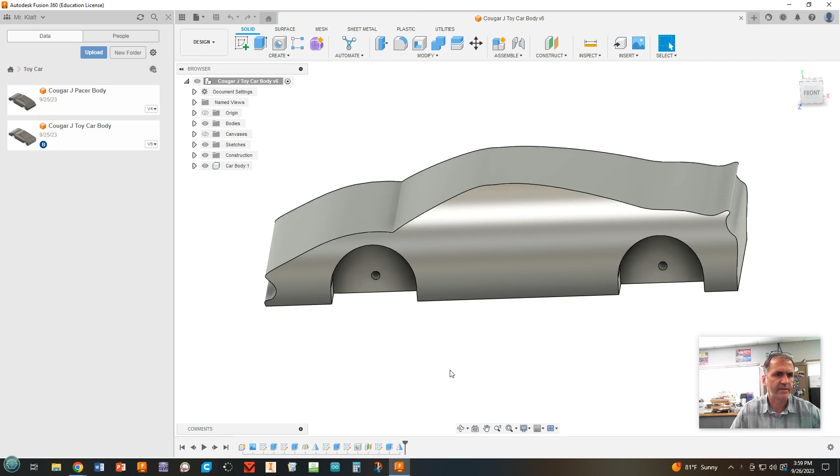All right, folks, welcome back to our continuing quest to make our toy car. We are now on part 3. If you haven't gotten to this point and don't have all the stuff that we did in part 2, make sure you go back and redo that because it has to be done before we move on.

Before we do anything, I need us to do some housekeeping stuff here. Make sure you're in your toy car project. I show more than you do. You probably only have one thing in there. I've already done some stuff in here. You should take your car, which I just renamed to be clear. Make sure you're looking at it, and we're going to right click and copy it.

Now, it's going to ask you where you want to copy it. You want to go to the same place that you are and make a copy. Notice it's going to show up and say the same thing as before. It's going to call it toy car body. They look exactly the same. But the one that you just made a duplicate of, we're going to right click, rename it, call it toy car body and add 3D print to that.

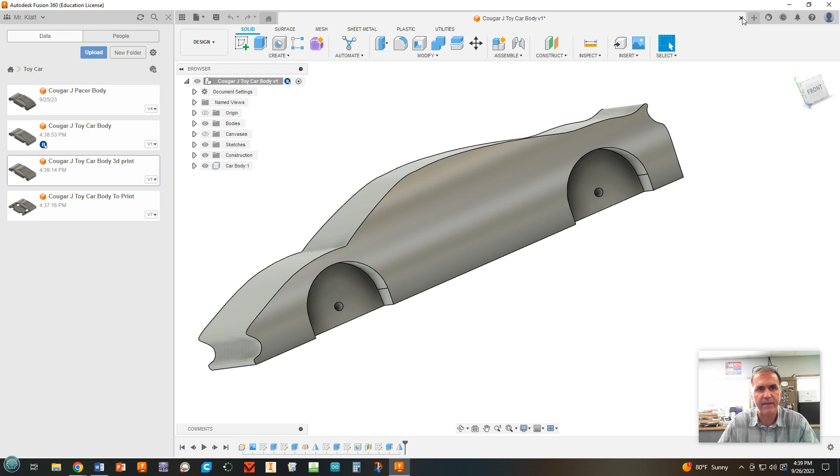All right. Now, let's make sure that we're in the right thing. So close the one that you're in. You can save it if you want. Make sure that we're there. And then open, double click on the one that says 3D print on it. Double click. Come on, open for me.

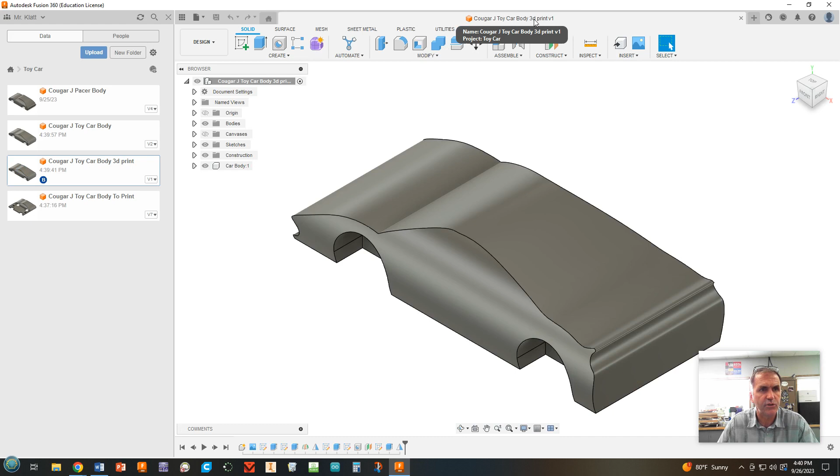Mine's taking a minute. Make sure that up here in the tab, it says 3D print, because we're going to mess that one up and do different things to it. And then we're going to come back to the other one later to do some different things on. So make sure you're working on the one called 3D print.

All right, before we start, there's a couple modifications that I need you to make, because I realized later that the axle holes were a little bit too small to fit the axles for the wheels. So we're going to go ahead and fix that. With your car open, hover over your timeline until you find the extrusion where we made that first hole.

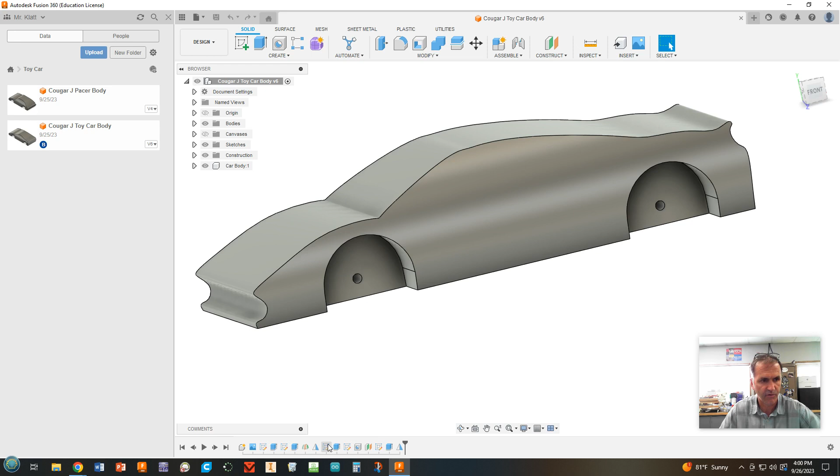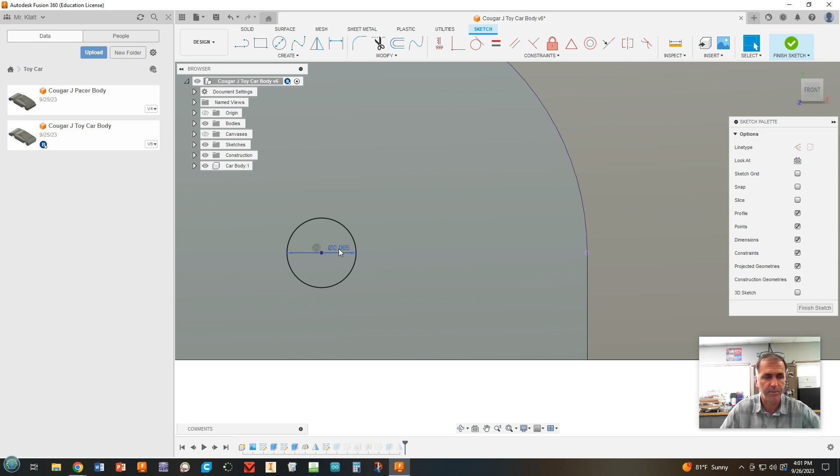There it is. Now, what I want to do is edit the sketch where that circle was made. So we're going to find the sketch that came just before that hole. See how it shows up when I hover over it? Double click on that sketch to edit it. Right now it says 0.05. We zoom in a little bit. We're going to double click on that 0.05 and make that 0.065. Enter. Notice how it got a little bit bigger. Finish sketch. And the hole just got a little bit bigger because I modified things.

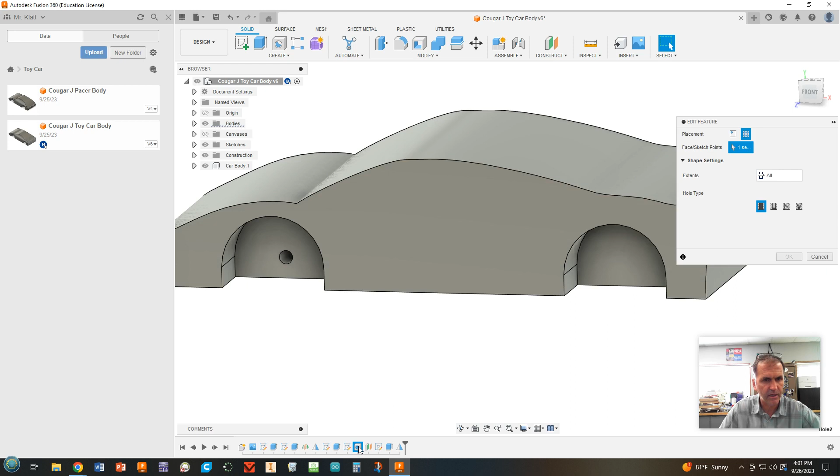Now we're going to go to the other one that we made, which was a hole. So again, hover around until you find the hole. Once we are at that point, we're going to double click on that. And again, we're going to change this diameter from 0.05 to 0.065. It's going to 3D print a little bit better that way.

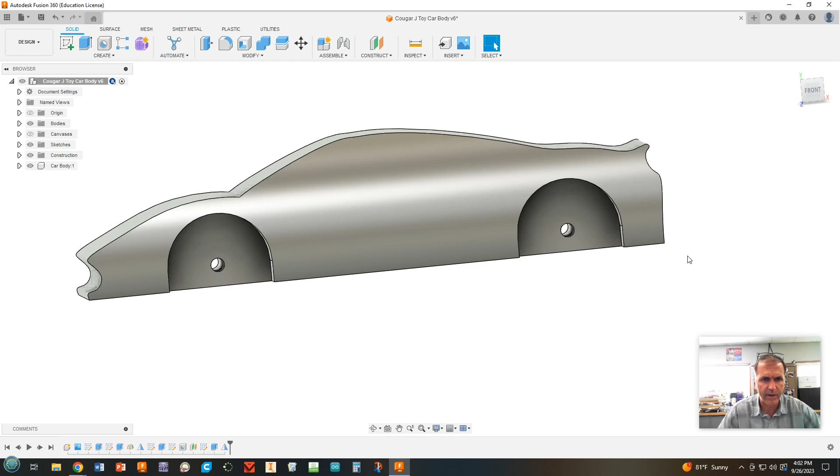Now, we need to do a little bit of checking to see if things are right before we move on. First of all, you should have a flat surface along the bottom that was that original 2.75 line that we made. There shouldn't be anything protruding below it. It shouldn't be wavy or anything weird. I noticed some students tried to draw along the bottom of the car with a spline line, which we weren't supposed to do. So if you don't have a flat surface with nothing protruding below that surface, then you need to see me and we need to talk about fixing it. So that's one part that needs to be true.

Another thing that needs to be true is that the center point of these axles needs to be 1.1 inches from the bottom. So here's how we're going to check that. We're going to go up to construct and make an axis through a cylinder. We're going to do this twice. So construct, axis through cylinder, and hover over that cylinder and you should see a blue line show up.

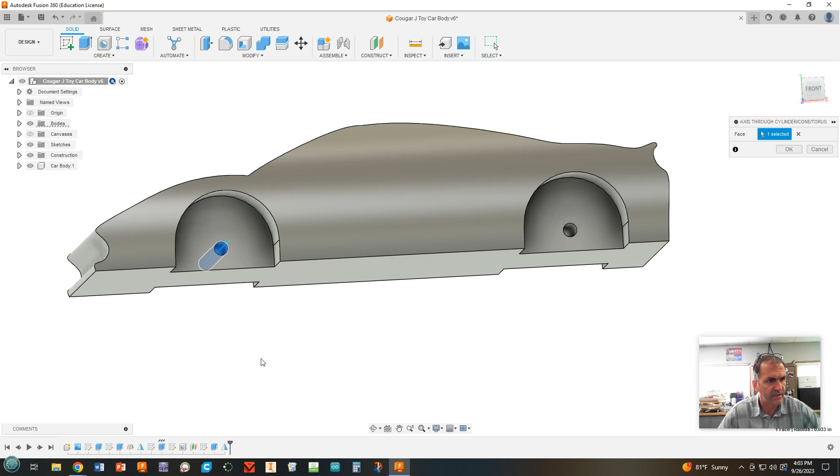Okay, then we're going to click OK, and we're going to do that one more time. Construct, axis through a cylinder, click on that cylinder. Okay, all right. Now we're going to do some measuring.

Move myself out of the way here, make sure I'm not in a command. Actually, I'm thinking a different thing that has the measure tool down there. But okay, we're going to go to inspect, click on that measuring tape thing, and we're going to click on the line, make sure the line highlights, and this face in the middle of the face, okay? And you should see somewhere that that distance is 0.1 inches, okay?

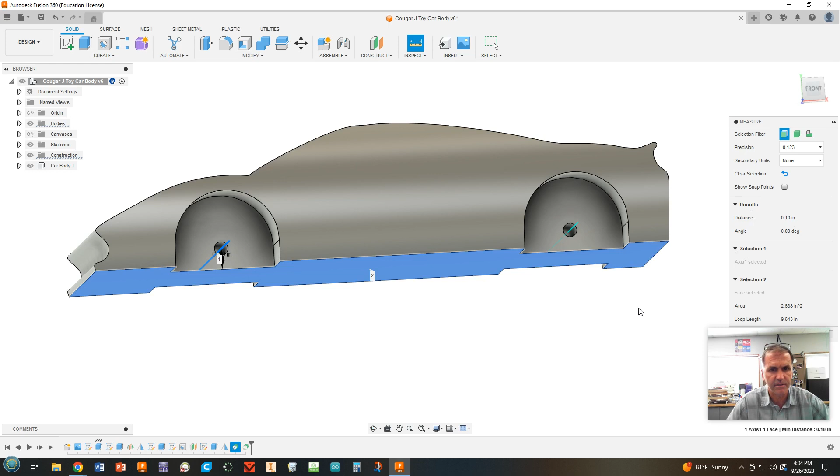And then we're going to do it again. Hit escape a couple times, inspect. We're going to go from this blue line to this middle of this flat face. And again, it should be 0.1. If that is not true, see me, because that's got to be that way.

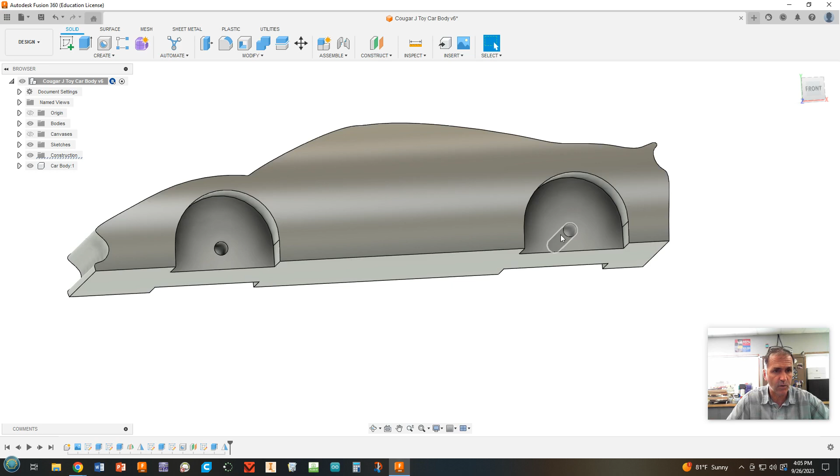Okay, once we have ensured that those distances are 0.1, we can go ahead and delete these two axes because we don't need them. And I like to keep things out of the timeline I'm not using. Okay. All right, now we're going to get this thing ready for 3D printing. Now, one of the things we're going to do is we're going to split this through these holes and then screw the bottom part back on. But I have to get the holes ready to go first.

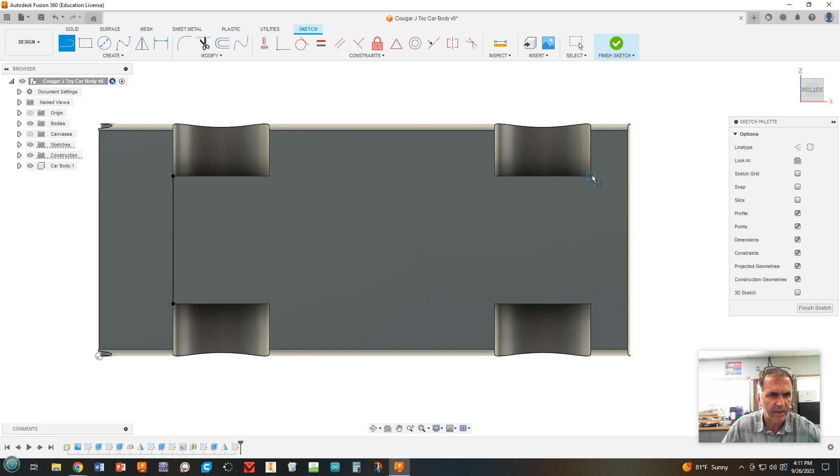Start by making a sketch on this bottom surface. So we're going to sketch on this bottom surface. Now we're going to draw a line between the outside corners of the wheel wells. So from that little corner of that wheel well to this corner of the wheel well, and the same in either the front or the back. Okay. And it's the outsides.

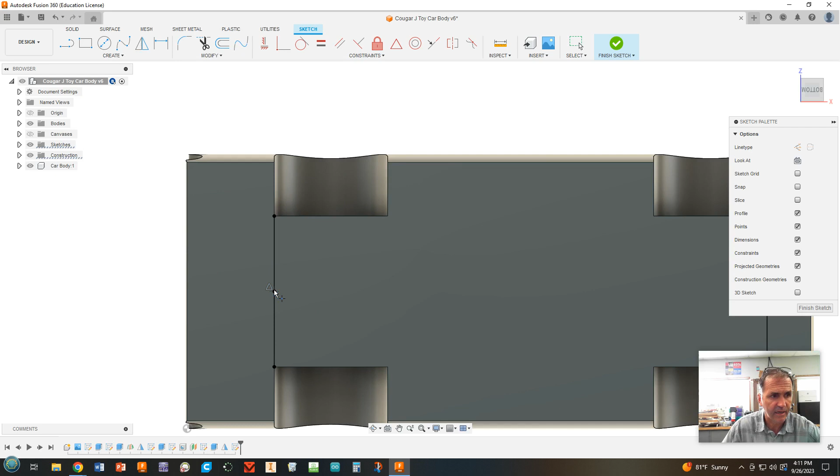All right, I'm going to hit escape to get out of that command. Let's create a point. We're going to create a point, and we're going to hover over that line until that little triangle shows up that shows I'm right in the midpoint. Click. It should be a black dot. If it's blue, we didn't get to the right spot, and it should show that little triangle. Again, hover around till you see that part. Okay, we've got two little dots, and once we've got that, we're going to finish sketch.

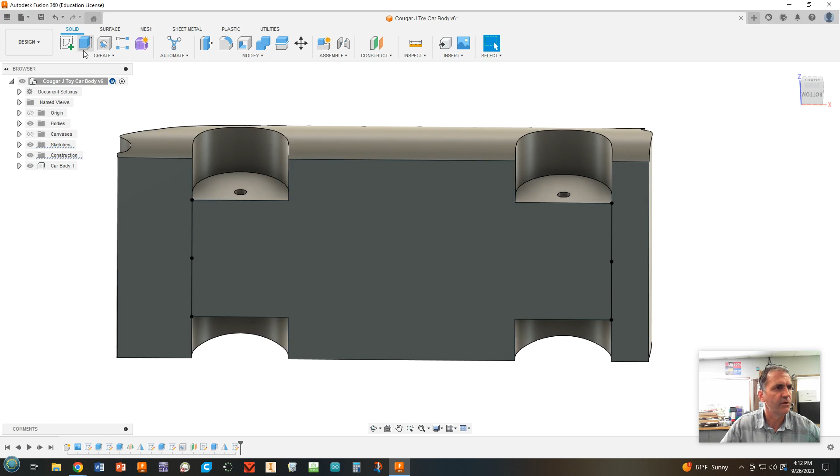Okay. Now, follow this process because this might not work for you the way we're doing it. And what will have to happen is you'll have to redo this with the lines on the inside if it doesn't work instead of the outside, but it's the same process. All right, so I'm going to go ahead and make holes on those points by clicking the hole command. Okay, now we're going to click those 2 points.

Don't worry that it looks crazy like this. Okay, we're going to click those 2 points. Yours might be totally different looking. They might look really weird. Don't worry, we're going to fix this. Okay, so while this window is open, the hole window, we're going to go ahead and click on this hole type we're going to put in the middle with the counter bore. Okay, it's got a little recess for the head of a screw to sit in.

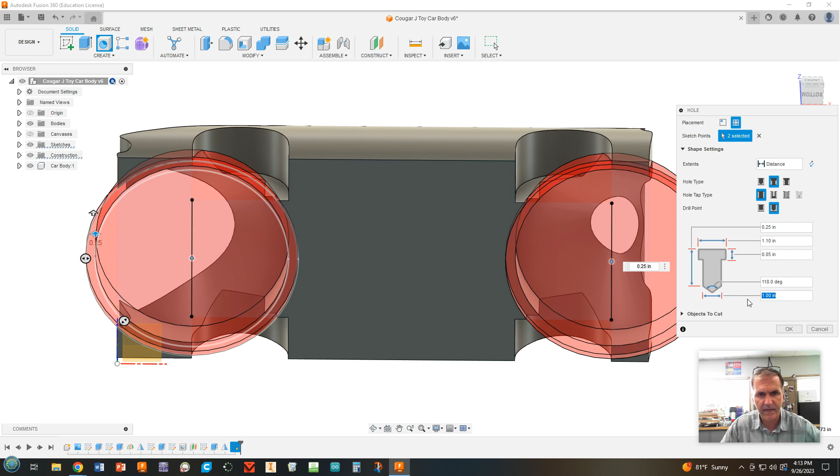We're going to keep the hole tap type simple over here on the left. We're going to keep the drill point the way it is. Now, I'm going to work from bottom to top here for making the right sizes. So the first one is the diameter of the hole. So you're going to click and highlight that bottom one and change it to 0.12. Okay, see that hole get smaller? It's all going to get better. Next is going to be this angle of the cut for the drill bit, which is going to be 100. Again, I highlighted it, changed it.

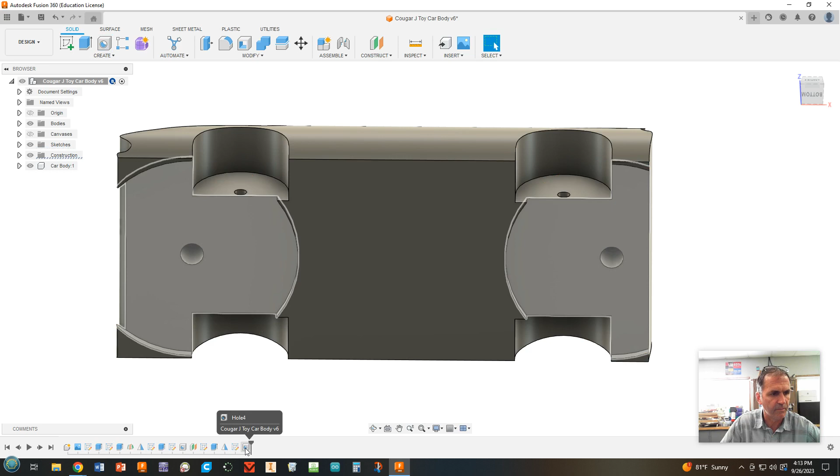But the height of this counter bore, the next thing, is 0.05. Now, it happens to be that way, but if it's not, 0.05. I accidentally hit enter. Sometimes that happens. Whoops, that's not what I meant to do. So I'm going to go back to this hole, double click it. I'm editing it again. Now, the width of the entire counter bore is going to be 0.25. Okay, notice things are starting to look a little bit better. And then the depth is going to be 0.3.

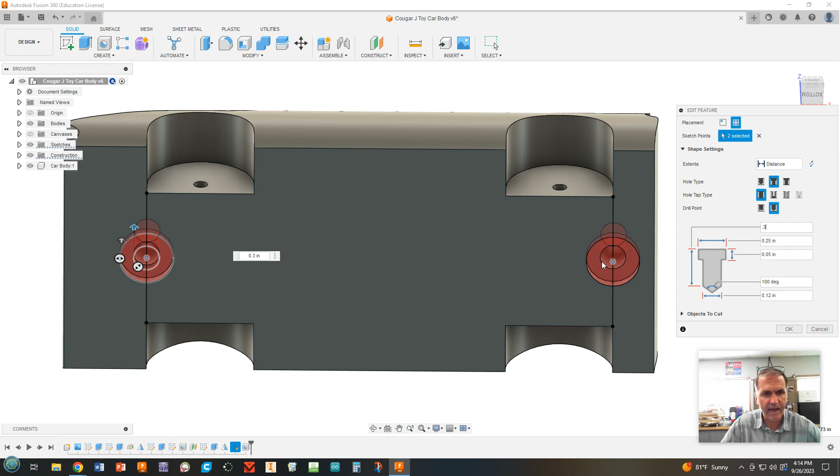All right, now, if your counter bore thing is off the end of your car, then what you're going to have to do is go back, and instead of drawing the line from here to here, draw it from there to there. So you're going to have to kind of undo some steps and go from here to here or here to here.

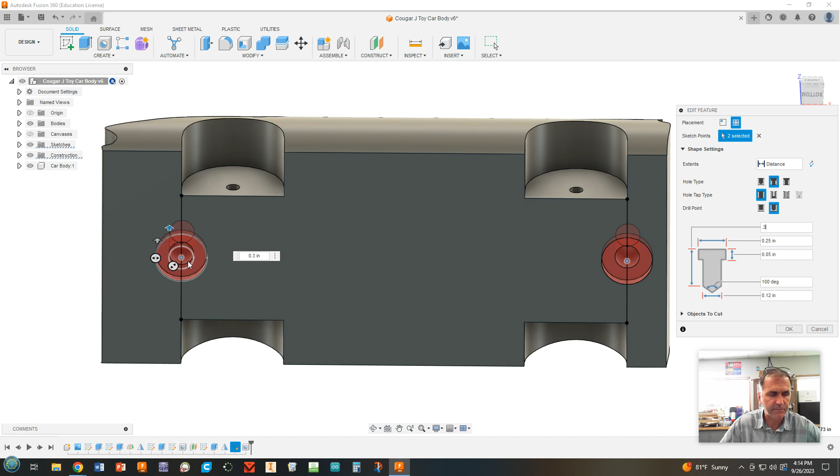to bring it inside. I'd prefer it to be out here, but it might cause you problems. And if it does, you can just fix it. Same thing if you find that in the preview, if this is going through the top, let me show you what I'm talking about. I'm going to make this like 0.5, right? So you can see it going through the surface. If you see that, or even just a little point,

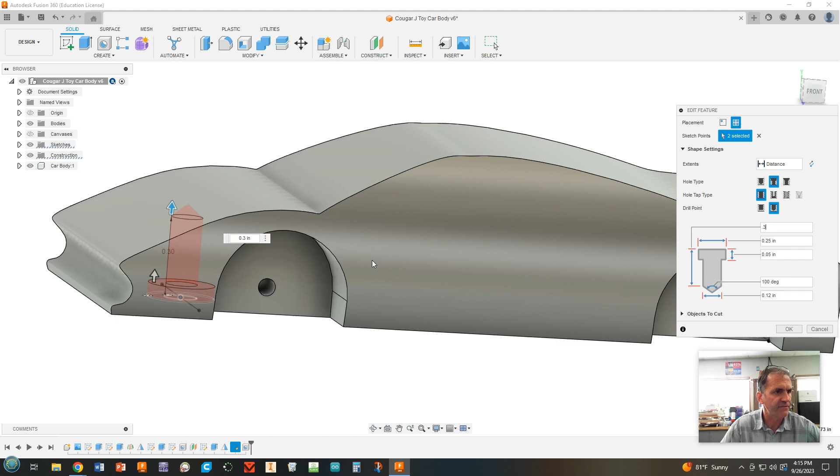okay, let me change that. I'm going to try and make it so what you might see, right? See how you can see a little bit of that hole coming through? Then again, you might have to put your lines and your points on the insides of the wheel well instead of the outside of the wheel well. So do what works for you. And once that works, we're going to click OK. All right. Now, we've got those holes.

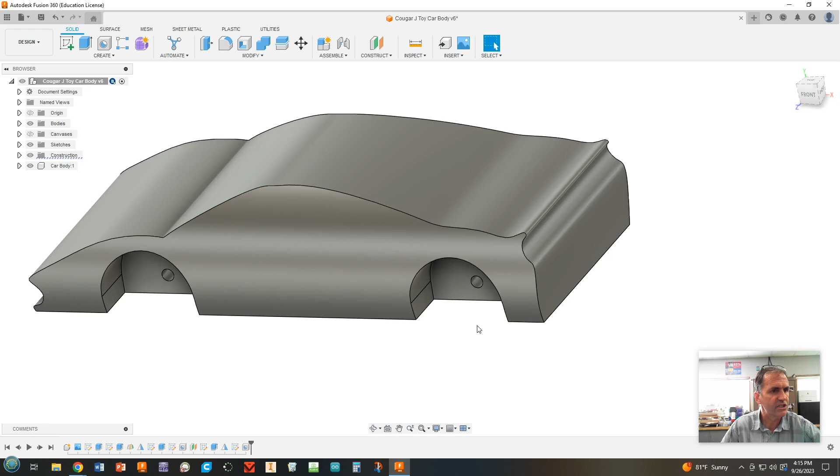Next is we are going to split this thing into two pieces. So here's how to do that. Remember that we checked to make sure that the center of this hole was exactly 0.14 away from this surface. So we're going to come to construct, and we're going to choose this first thing that says offset plane. We're going to click on this flat surface down here right in the middle of it. Now notice it wants me to pull downward, but if I go upward, see how I'm going in a negative direction? So you're going to change that to negative 0.14.

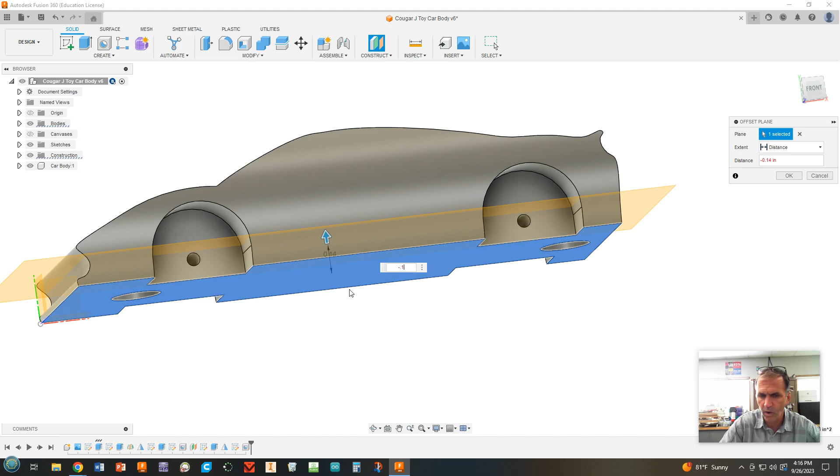Enter. And that plane now should go right through the middle of those holes because we checked it before to make sure that that was true. All right. Now we're actually going to cut this into two pieces. So watch the way this happens. Up here under modify, or it might be up here already there, is a split body command. So you're going to click on split body. Okay. It asks me what body I want to split.

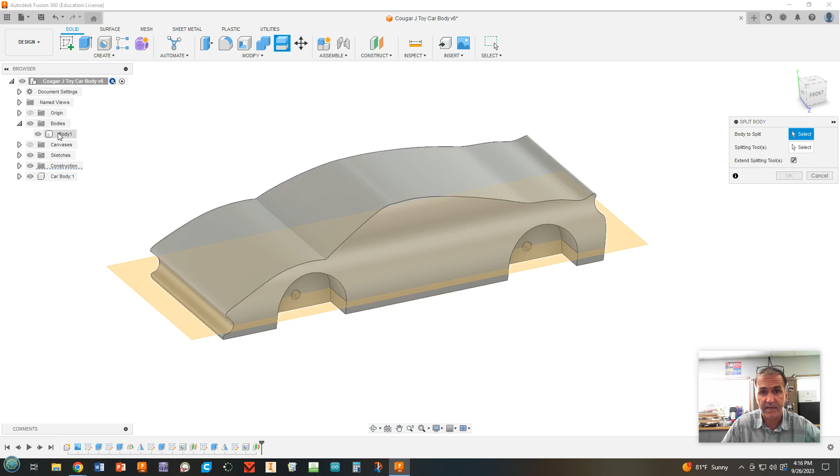Remember, blue means choose something. So I can click on this body. You should only have one existing body. If I expand bodies, it's just one thing. If you have more than one, see me because you have problems. Okay, so we click on that one body. Notice it says one selected now. My splitting tool, I'm going to click that to make it blue, and I'm going to select that plane that I just made. Okay, it'll give you a little pink preview to say, okay, what are you doing? And we're going to click OK.

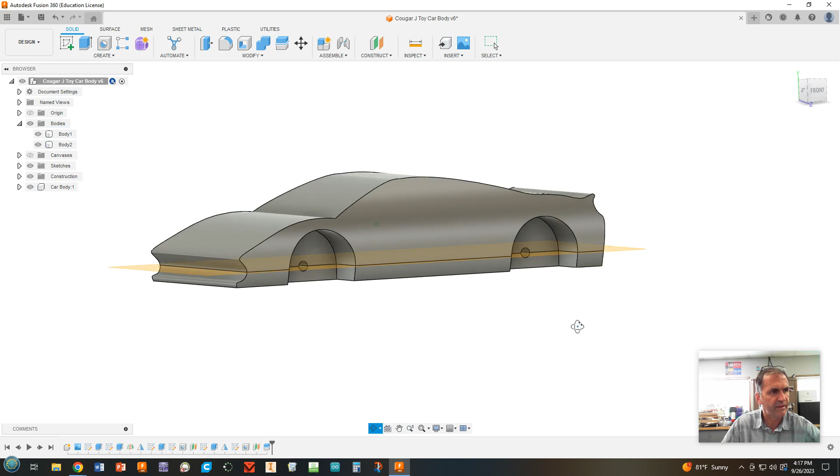All right. Now what we did is we just split this into two bodies. So if I expand bodies, notice there is body 1 and there is body 2. If you turn it off, you can see, oh, there's the first one off. There's the bottom one off. Okay. All right. Now, what I want to do is I want to take that second body I made and be able to move it around. So I'm going to make that into a component.

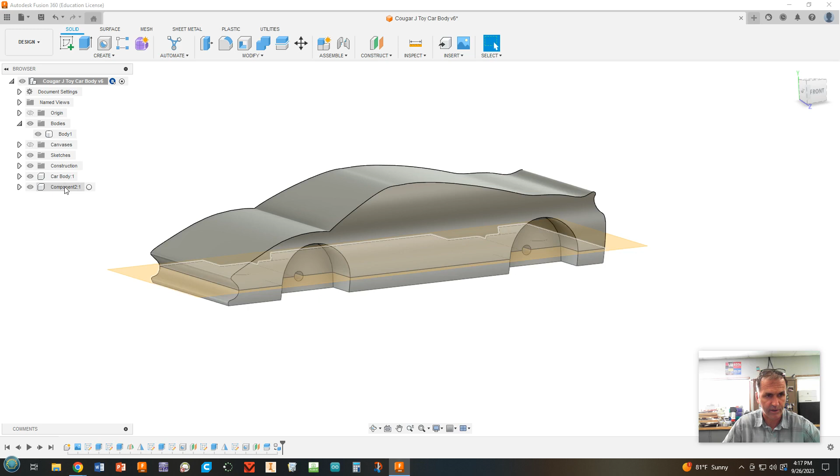So come over, expand bodies, go to body 2, which is the thing on the bottom, right click on it, and we are going to create components from bodies. Click on that. Now notice what happened is it shows this thing called component 2 down here. Okay, so we have component 1 and component 2. That's good. That's what we want. Now I can actually take this thing and move it around, okay, the bottom. So that's good. All right.

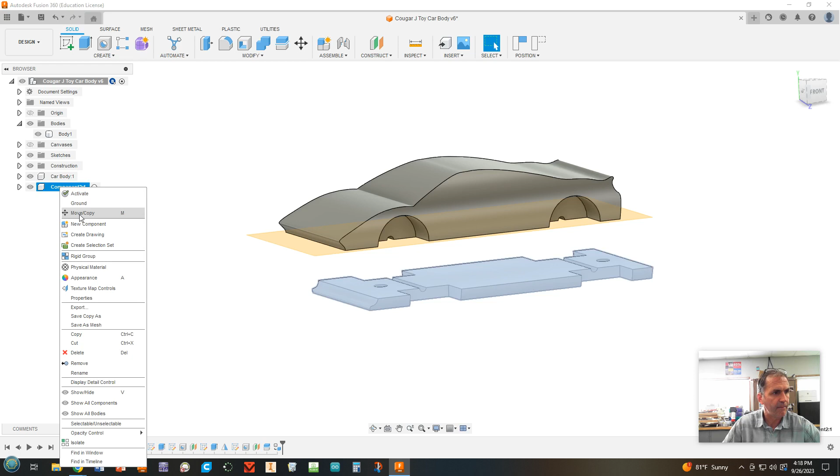So now what we're going to do is we're going to go ahead and pull that around a little bit, okay, and I want to flip it over so that we can print both of these things from a base. So here's how to do this. We're going to go here to component 2, right click and hit move or copy. And what I want to do is I'm going to move my mouse around so I can see what I'm doing. I want to flip that over lengthwise around this way 180 degrees.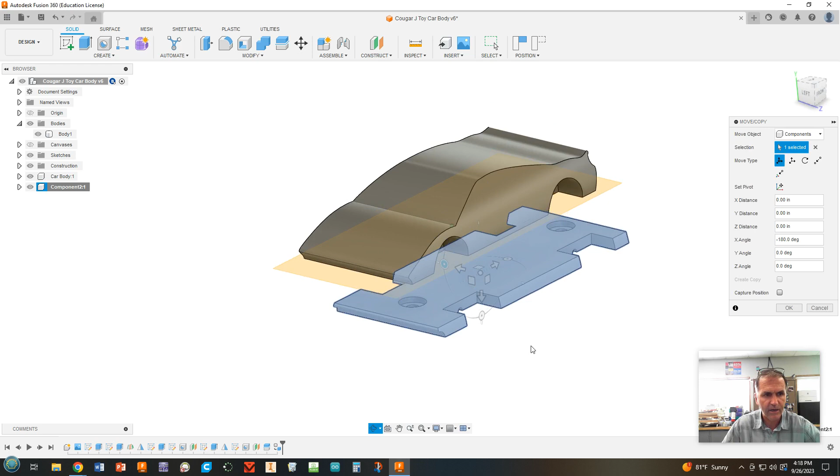Okay. Make sure you click the right one. If it didn't work out, just undo it and try it again. But we've got to still have the length be the length of the car. But now those counter bores are facing up. Okay. And now I'm going to scoot it out just a little bit out here. All right.

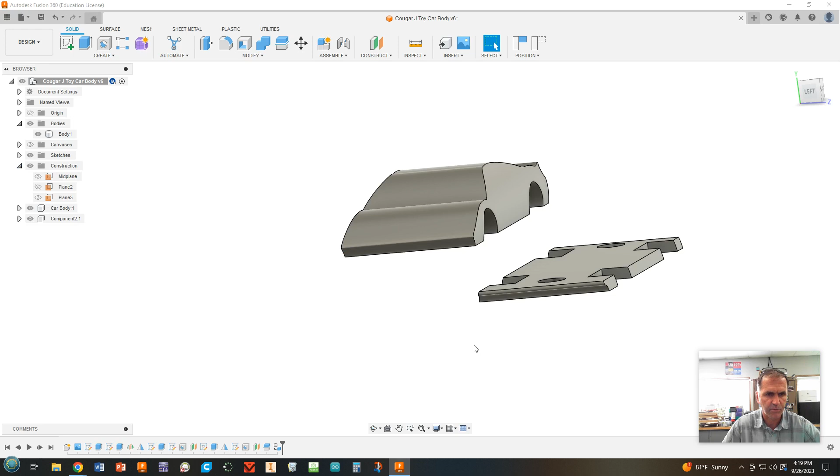Once you've got it the way this looks, click OK. Good. And I'm also going to turn off that plane I don't need anymore. So I'm going to expand construction and turn off that last plane. All right. Now I want a 3D print starting from this bottom here and put those together.

So we haven't talked about assemblies, but it's not going to be hard. You're going to go up to assemble. And what you're going to do is make a joint. Just follow with me, assemble, joint. There's a window that pops up. Okay, see how there's two tabs that say position and motion? Click on motion and change your type. It probably says rigid. Change it to planar.

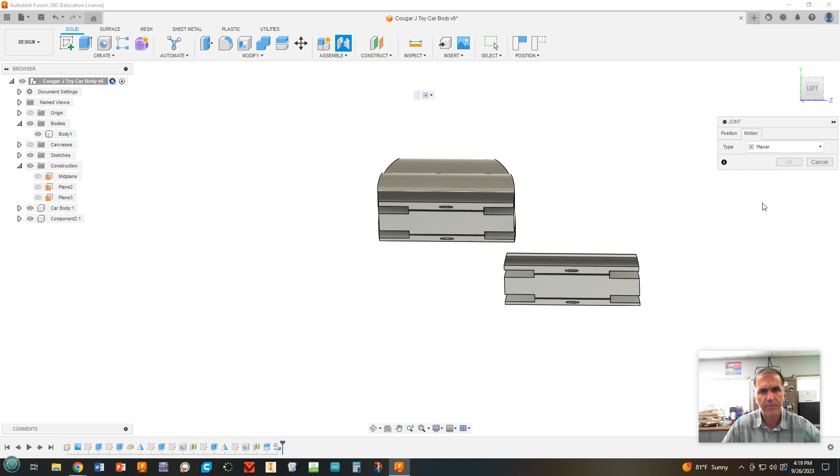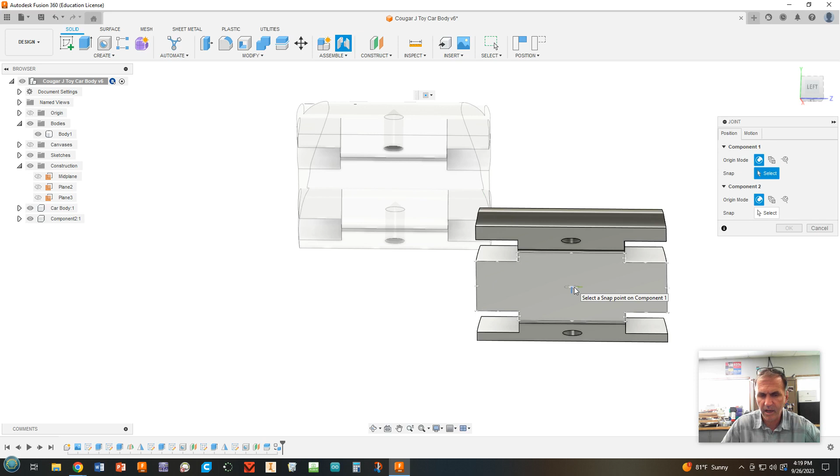Okay. And then go back to position, click on position again, and we're going to click in two faces. Now watch carefully what I'm going to click on. We're going to hover around until, maybe I need to move this a little bit so I can see. I'm going to click right in the middle of this face. See how it sort of snaps to it? And there's a little blue line that's sticking straight down from this.

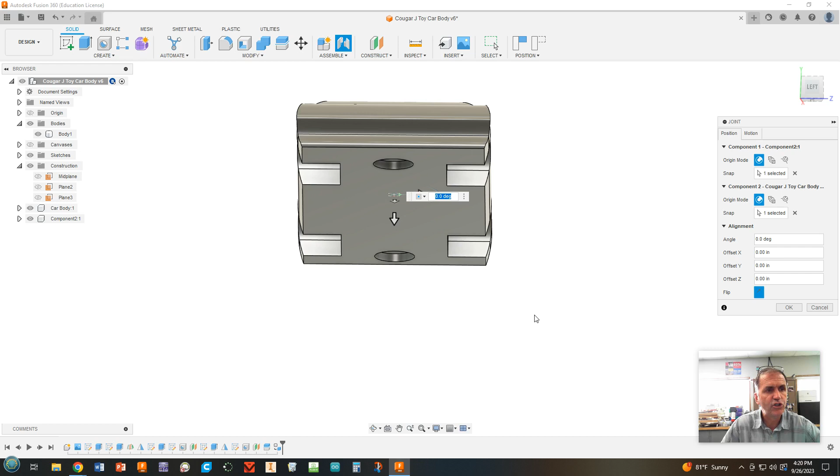Okay, we're going to click once right there. Notice that it highlights the other piece now that I can put together. And we're going to do that too with the same, that blue line's going the same direction. Click, okay? Now, I don't want it exactly the way it is yet, so don't click OK, but I do want to grab one of these arrows and just pull it out a little bit.

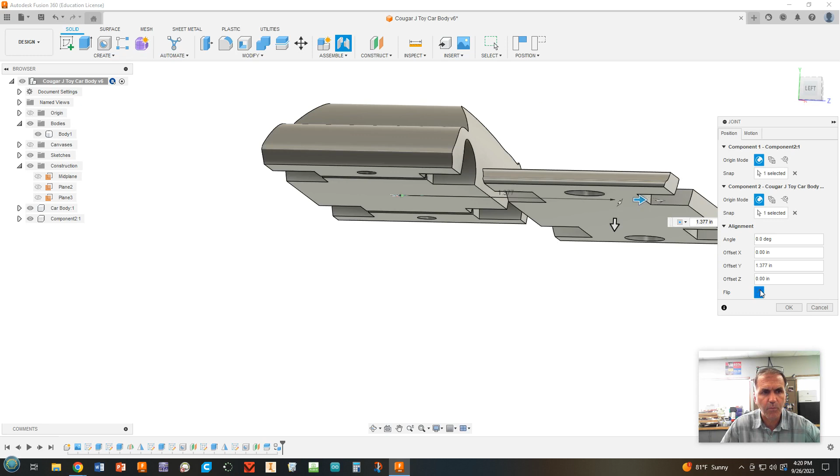Now, right now, it put those things together, but remember I wanted these up, so I'm going to flip it, okay? So again, I flipped it from where it ended up because I want both of these things on the same plane. These are coplanar now, they're flat, and I want my counterbores pointed up. If you click on either left or front or whatever, you should see that these surfaces are flat to each other.

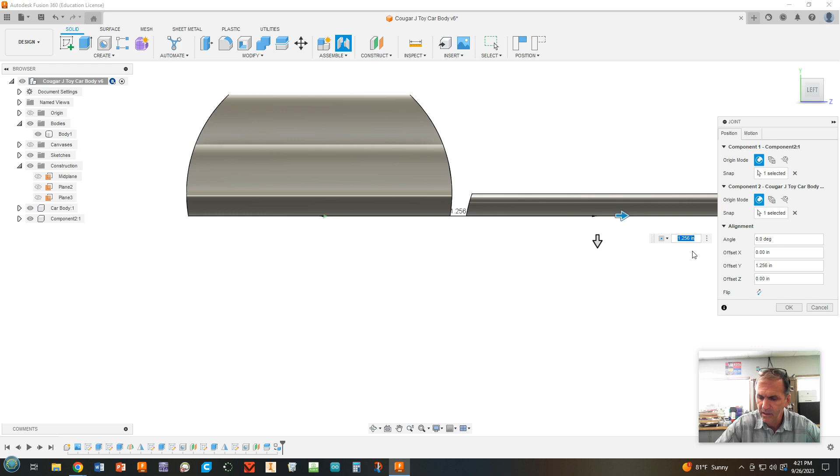And actually, before you click OK, grab this and you're going to move it fairly close. So your distance ought to be like 1.25. In fact, let's go ahead and do that and make that offset. See how it says offset Y? 1.25. Good. They're close to each other, but they're still kind of connected to each other.

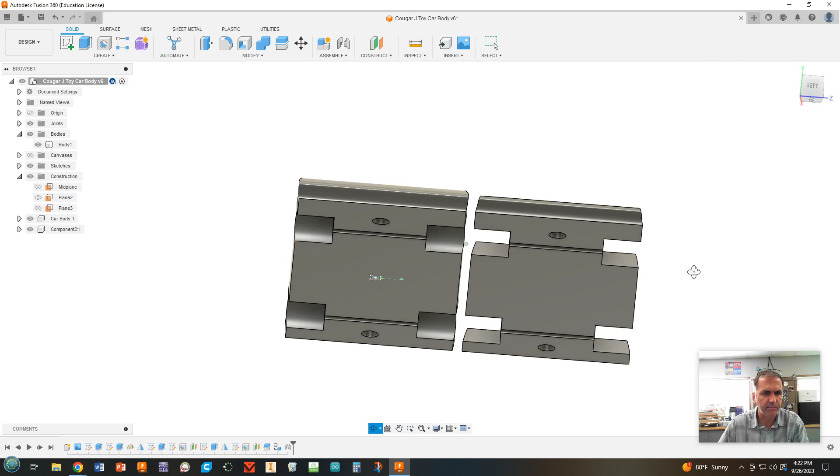All right, cool. Next, the screws are going to get threaded into here, but I don't want this hole getting in the way of those threads. I want it to be a little bit bigger. So we're going to flip this around to look at the bottom, and we're going to sketch on this bottom surface of that flat piece. It might rotate, it doesn't really matter. Okay, so I'm looking straight at these two holes.

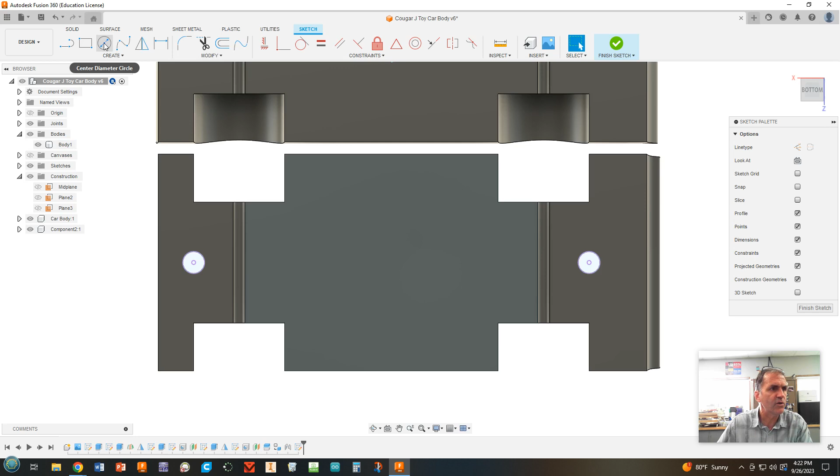You're going to hit P for project, and I'm going to click on this circle, make sure just the circle is highlighted, and I'm going to click on that circle, make sure they're highlighted, and then click OK. And you should see some little purple dots show up. Okay, all right. Now we're going to expand these holes a little bit by clicking on circle, click on that middle point and bring your circle out. And we're going to make this 0.14. Enter. Okay, see how it's making it just a little bit bigger?

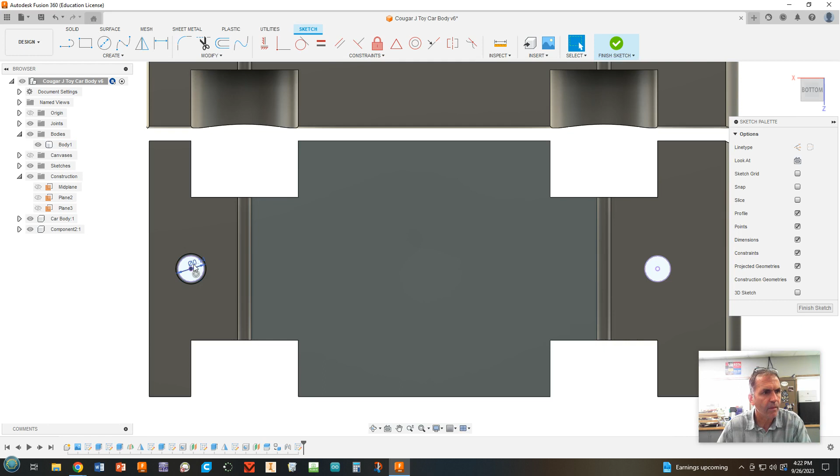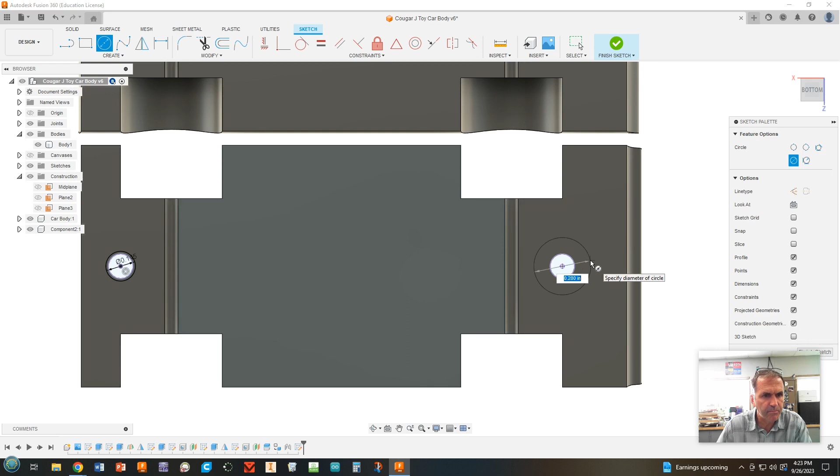Same thing over here. Actually, you know what? I'm going to change my mind and fix that. I'm going to double click on that dimension itself. Let's make it 0.145. There we go. That's a little bit better. Let's do the same thing on the other one. Draw a circle. Snap to the midpoint. 0.145. Good. Finish sketch. And we are now going to extrude those two things.

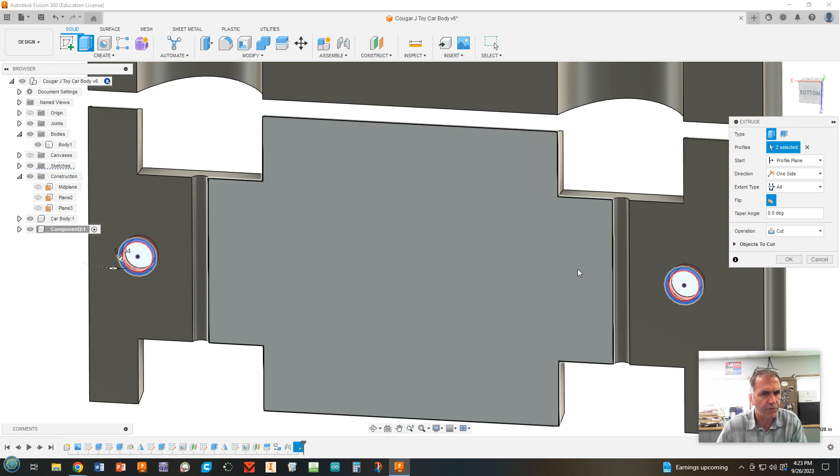Okay, we're going to extrude, zoom in, because we're going to extrude that little donut and that little donut, but we're going to turn it around and go the other way so that it says cut right here, and we're going to go through all of it. Okay, we're changing our extent type to all, and we're cutting. Make sure both things are being cut. Okay. Cool. So now those holes are a little bit bigger so that the threads of the screw will bypass that.

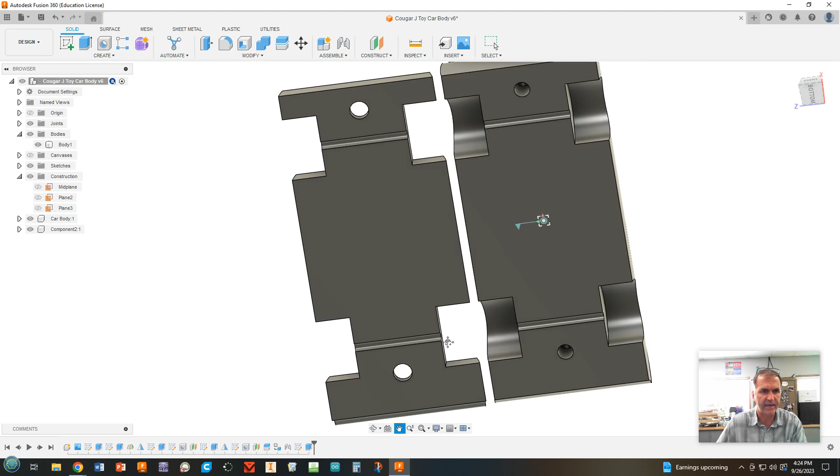All right, cool. Looks good. All right, folks, we're about ready to 3D print this dude, but we've got one more step because these are two separate bodies right now. And I want them to be connected together because I can only 3D print just one body.

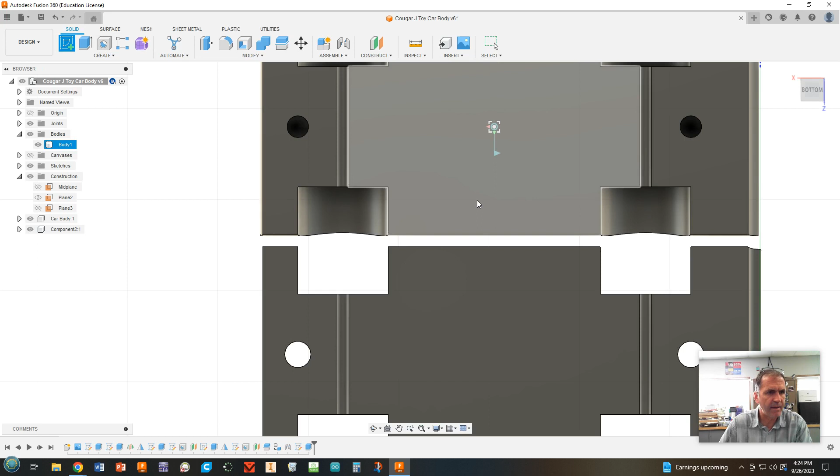So get it around to where you can see this and click on your view cube to make yourself flat. If it rotates the wrong way, you can use these little rotate buttons. All right. And what we're going to do is we're going to draw one simple rectangle across here. So I'm going to sketch on, it doesn't matter which surface. We're going to sketch on one of those surfaces. Let's pan this whole thing so I can see what I'm doing. And I'm going to make a rectangle, a very simple rectangle.

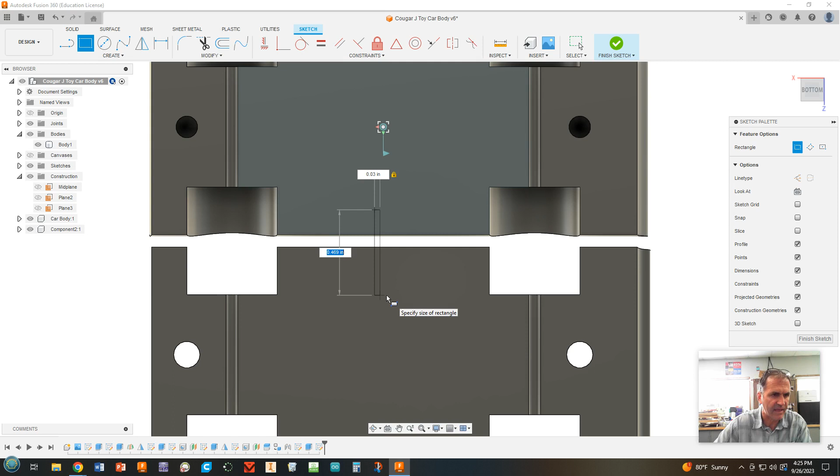Now, it doesn't even matter where you start or where you are. This is just going to connect the two pieces together, and we're going to break this little piece out. Okay. So as I'm hovering, notice that I can tab back and forth. I'm going to make that little skinny part 0.03. Okay. Tab to the other side, and it doesn't even matter how long it is. You can just keep it that way as long as it goes through both parts like this, from one to the other. All right. But it's 0.03 in width.

Now we're going to finish sketch, and we're going to extrude that part, and we've got to make sure we go the right way. So we're going to extrude. We're going to choose this rectangle, the whole thing. We're going to go the other way. Now, it probably wants to cut, but we don't want to cut. We want to join, okay? And we want to go a distance of, now notice it's negative 0.03. So it's a little 0.03 by 0.03 little square.

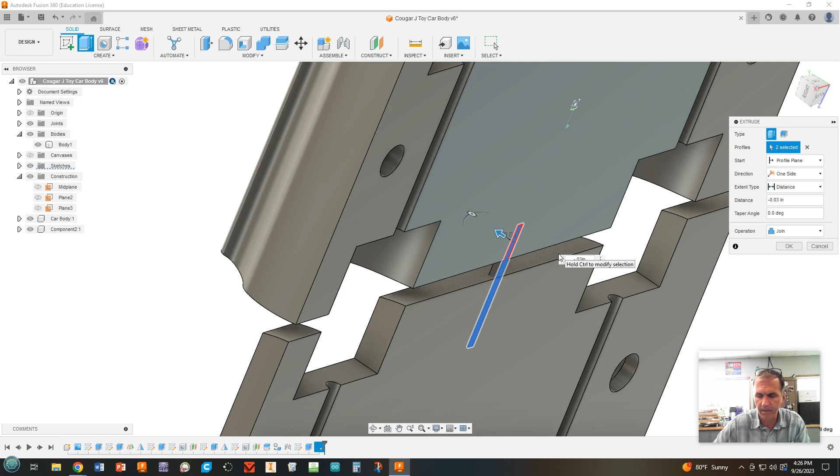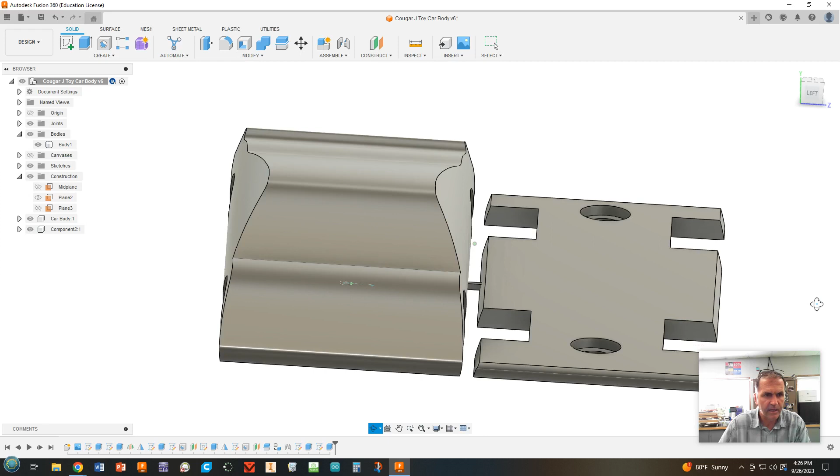And okay. Now, it's showing a little bit of a rectangle right there, but it doesn't matter. It's okay because it's joining this, but it's not joining that. That's still a separate body. All right, we're going to move this whole thing around, okay? Again, if it didn't work out right, undo and try again.

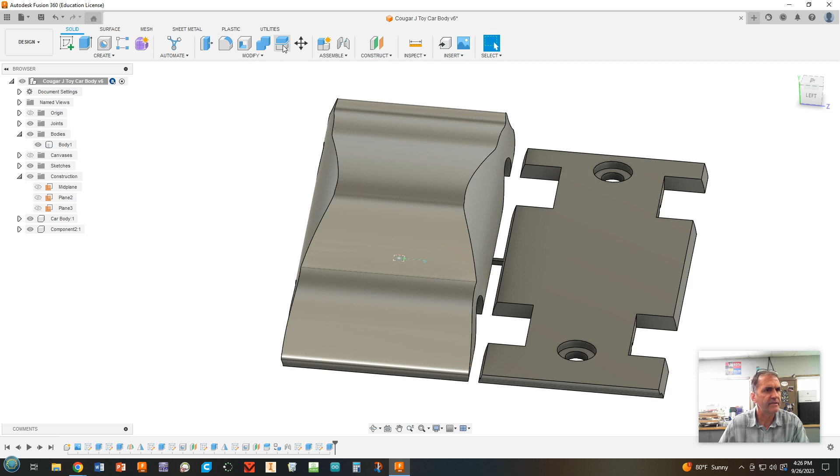And now we're going to join the two bodies together because notice we have these two things. We have this component and that component, and we need them to be one to do the 3D printing. So here we go. Let's go ahead and hit Combine Bodies, okay? And choose one as your target body. It doesn't really matter. We're going to click one of them, and then notice now it's switched to select a tool body, which is the other one, okay? And we're joining those together, and we're going to click OK.

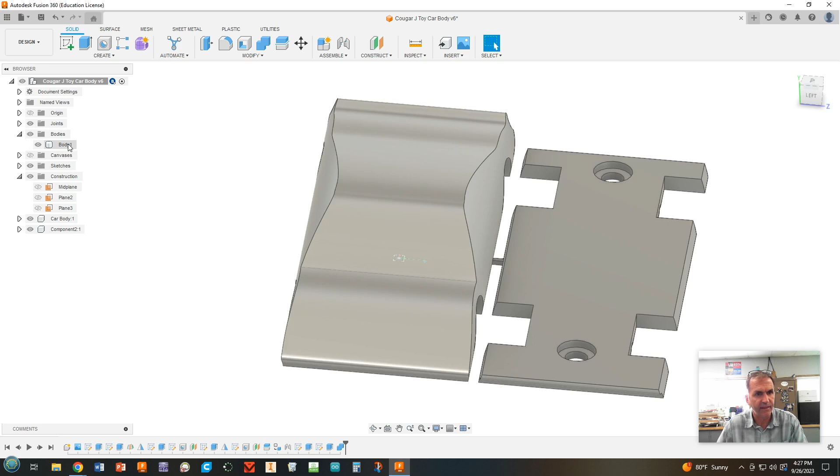Okay. And now what should happen is if you now look over here in bodies, we only have one body and the whole thing highlights. And that means that we are ready to 3D print. And here is how to give me the file for 3D printing. Once you're done and you've got your little tab piece and all that, you're going to come up here to Utilities, okay, and Make, and a window will pop up.

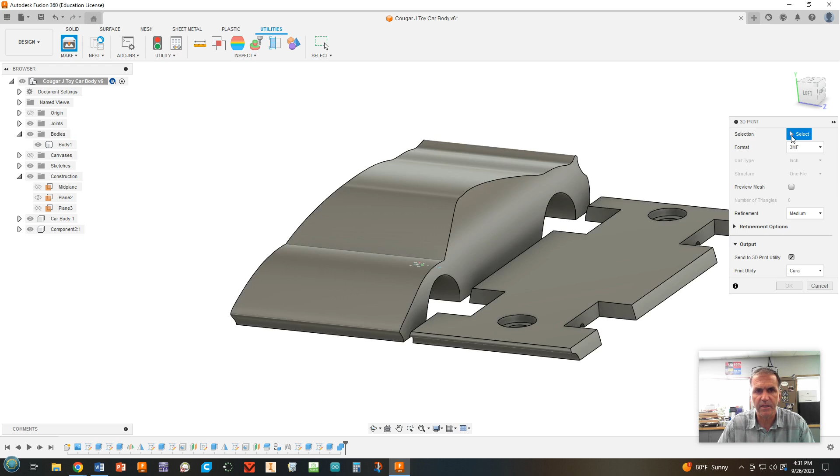We are going to turn your format from STL, make it 3MF. Your selection, what you're going to click on is this one body, okay. So notice we have one selected. That's good. It should be in unit type of inches. Refinement is medium. Please don't change that. And then you are going to uncheck Send to 3D Print Utility.

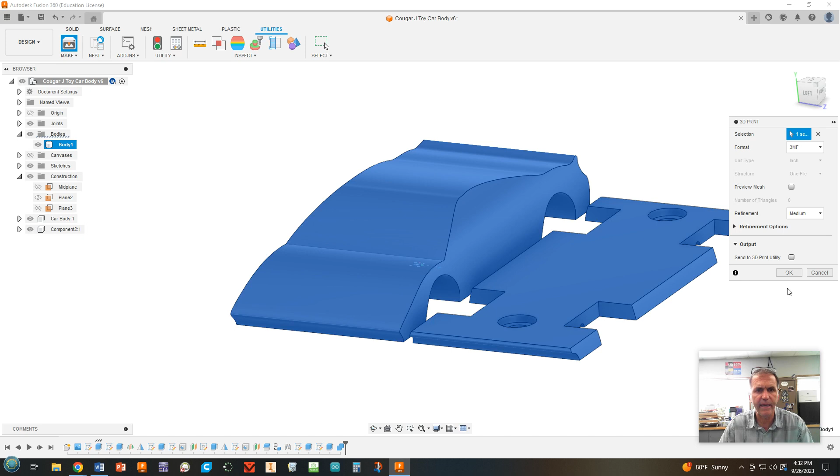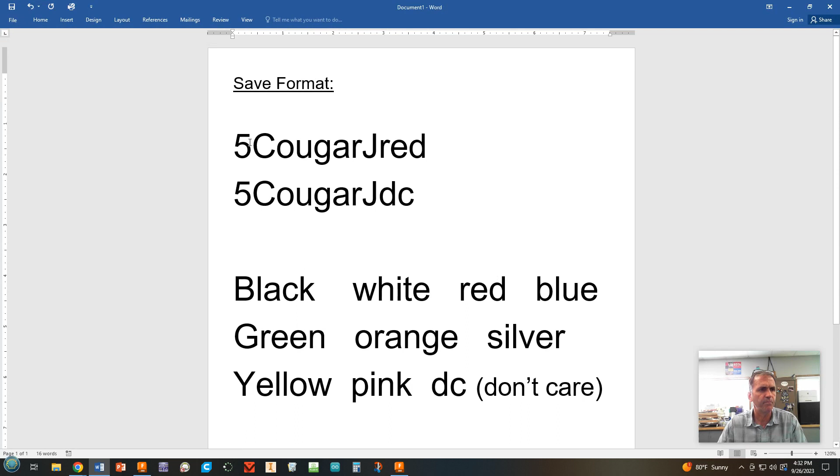Now, when you click OK, it's going to ask you to save a file. So you're going to click OK, and it's going to save this. Don't worry if this thing says viewable in Fusion Team. I don't know why it says that. You can still save it. Here's what is important. You're going to change your name to your class period, followed by your last name and first initial, followed by the color that you want.

Here are your color choices, okay? Black, white, red, blue, green, orange, silver, yellow, pink, or if you don't care, put DC. Here's an example of that. So here's 5th period, name of the person, last name, first initial, DC means don't care. So you're going to save that file, okay?

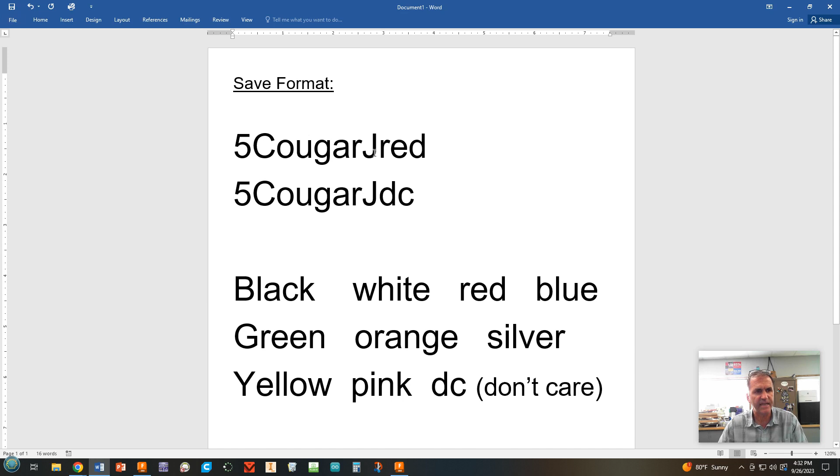Now, when it says save to your computer, make sure you know where you're saving it to. Right now, it's going into the downloads folder, okay? So you need to know where it is because you are going to then move that from that folder where you saved it into the folder that I gave you a link to on the assignment.

All right, folks, we will have more to do with this, making wheels and all sorts of other stuff.